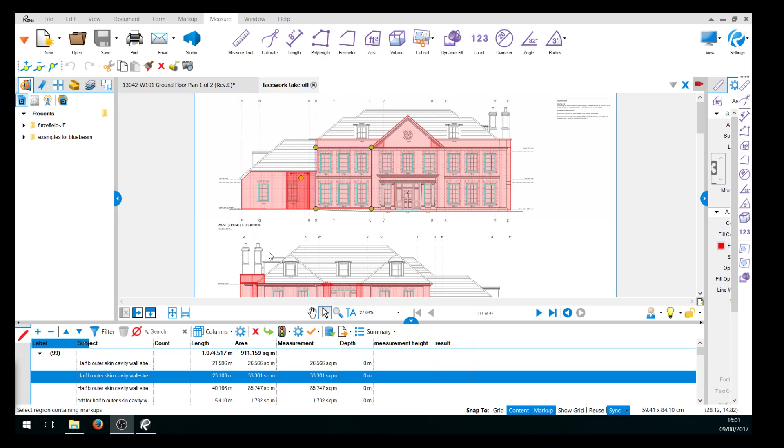Taking off, do's and don'ts and tips. And before we do that, there's one thing I'd like to explain that I didn't quite touch on before when I was explaining how this spreadsheet, as I call it, area works.

That is basically that this length, width and height column that appears in Bluebeam by default will pre-populate with the data from an area tool. So for instance, that one you can see highlighted by the bounding box and the nodes, that's the side dimension of the width and the height for that shape. Don't confuse that, so that's why they're now turned off.

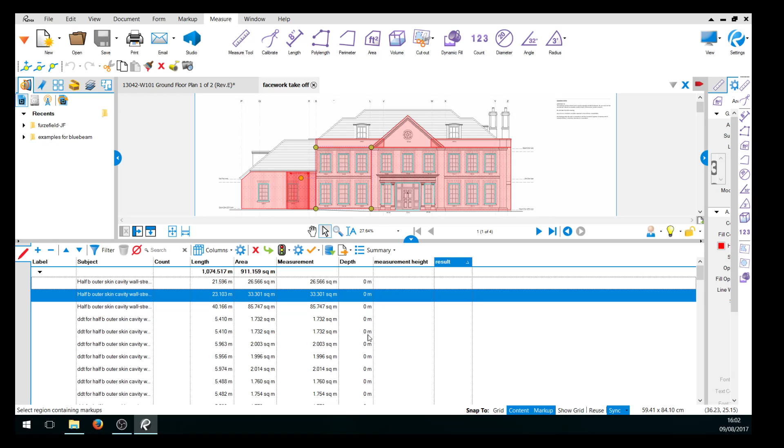We're only concerned with the area tool as we measured it, so that can cause a bit of confusion. Be mindful of that. The reason I'm differentiating between that now, and didn't do it previously, is I've got these custom columns I've created over here that manipulate data in a way you may find useful when we look at this plan taking off. So let's move on to that.

So let's calibrate this drawing here, and I'll talk you through a couple of do's and don'ts or tips on plan taking off. So we'll calibrate and we'll go 3.72. So we're now calibrated, let's just check that.

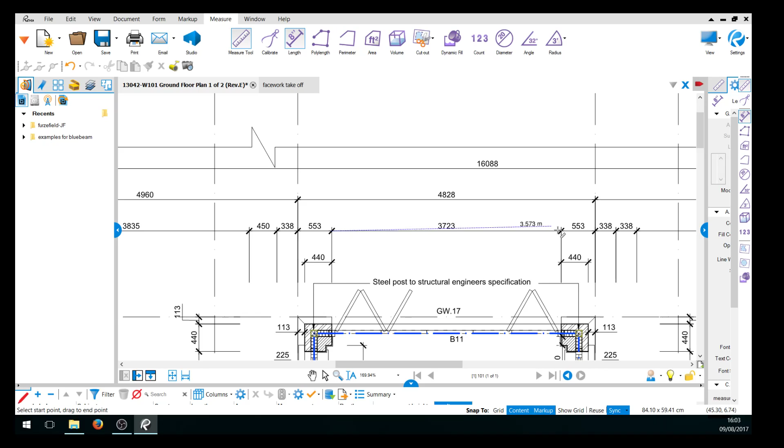Near enough, right. Let's go for this internal 215 block work we've got inside here. Let's find the 215 internal block work tool. And I've got it here. So let's try a couple of dims in here.

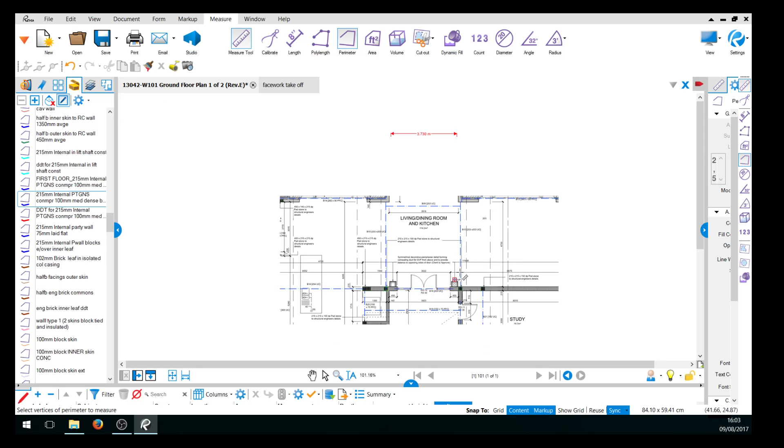Now I don't know about you, but on a one-off job like this, I wouldn't always spend the time taking off, deducting the doors. Conversely, I just wouldn't measure the hoisting and bedding of the lintel. But if you are going to go down that route, and you need to go down that route, what I suggest you do is create an inverse tool.

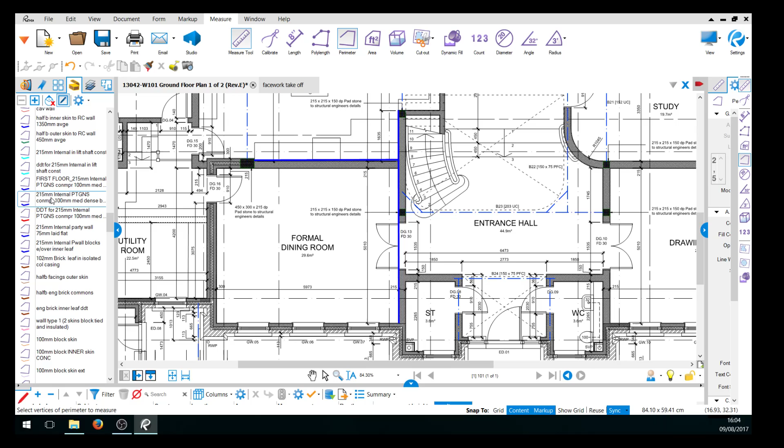So you've got the 215 partitions here. I've basically got a deduct tool for the same, and all I need to do is go in and put that dim in there. It's contrasted so I can see. So you can see in my subject window, I've got my 215s.

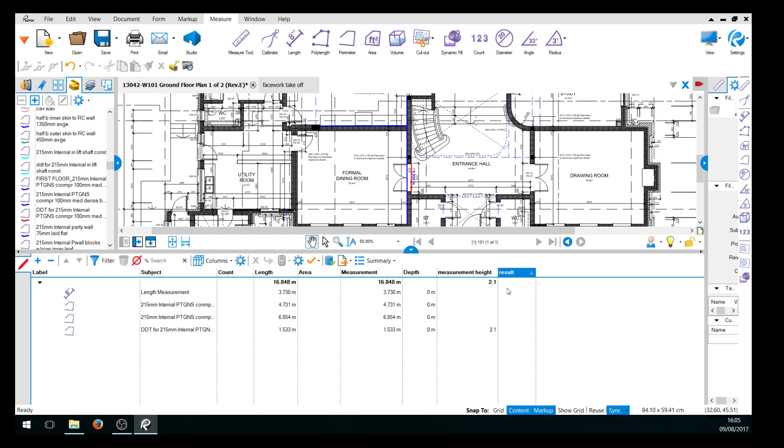When I export that into Excel, I can put my story height in there, and I've got my deduct for my 215s. What I've done, I've created a custom column here just as a bit of an aide-memoire, so I could put in here the height of that door that I've deducted at 2.1. There is a way of making this column add that up, and I'll come onto that in a few minutes.

Again, applying the same principle, on this particular job I took off the cavity work through the wall elevationally, and what you might notice is the majority of it is 100mm inner skin, but there are certain areas where the planks are bearing that I've got a thicker wall on the inner leaf. So I would just need to add that as an extra over.

So I've got an extra over tool for additional thickness. I've got this as 100mm, but you can create a tool to suit. So all I would do there is very similar to what I've just done with the deduct.

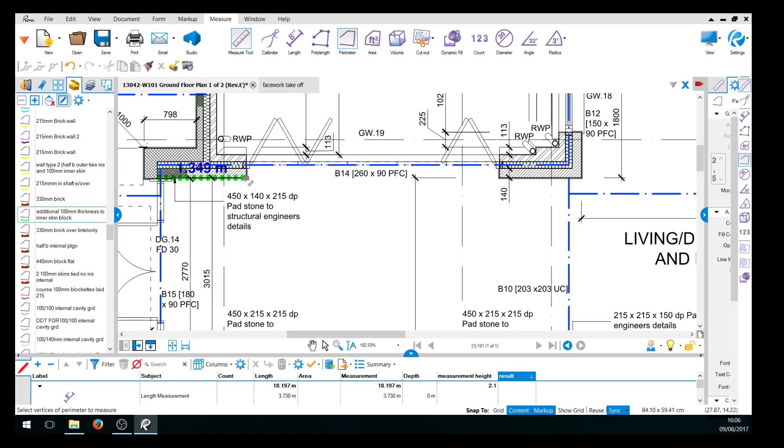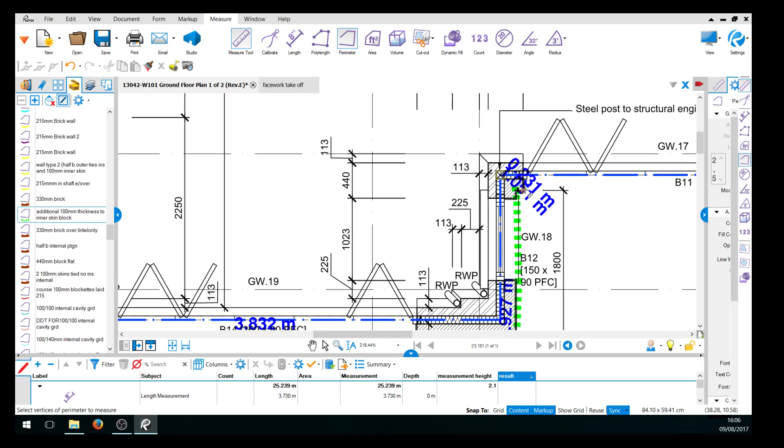I'll measure that pier, I will measure the opening, that pier, round to there. The reason I'm doing it separately is so that I can go and put my height in separately for each one, rather than have to redo the deduct, because it's only an extra over.

So for instance, I've got that pier at say 3.2 story height, that opening at the remainder, what's left above the lintel. So it's probably, I don't know, say it's 600 left, 0.6, whereas that pier there is my full story height.

Again, once you export that data, you can manipulate it in the spreadsheet window. I'll show you quickly how to create a custom column also that can take that height and that length and actually give you a result here before you export it.

Sometimes it's handy, but again I find it's information overload, because 9 times out of 10 I know what I've taken off in the takeoff window, and I'm going to manipulate it in Excel once I get it into Excel myself.

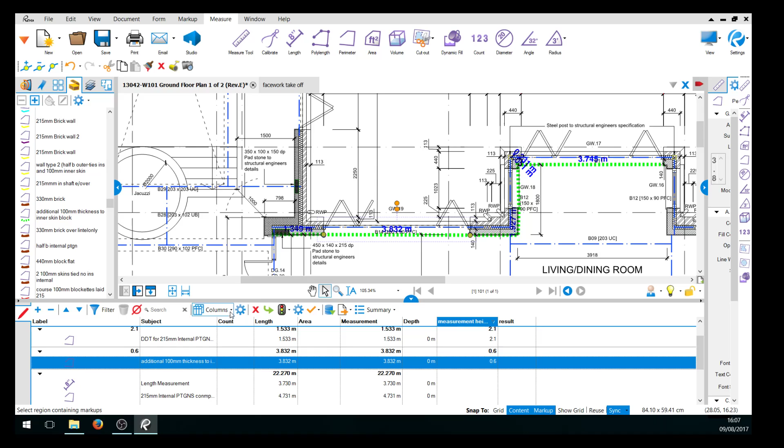But the way you go about creating a custom column, it's the same for this column here. I've called this measurement height because the inbuilt width and height columns only apply to areas. How you would do that: you go to columns, go to the cog, manage, and once you open up the dialog you'll see custom columns that I've created, in the custom columns tab.

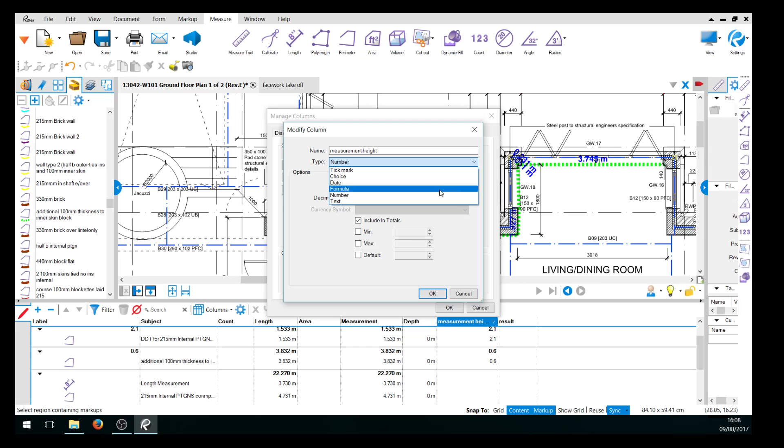If I just modify that, so what you do is name the column. I've named it measurement height, and you tell it what type of column it is. It's a number. You can have a text column, date, or formula—we'll come onto formula in a minute, that's what the result column's based on—but this is number.

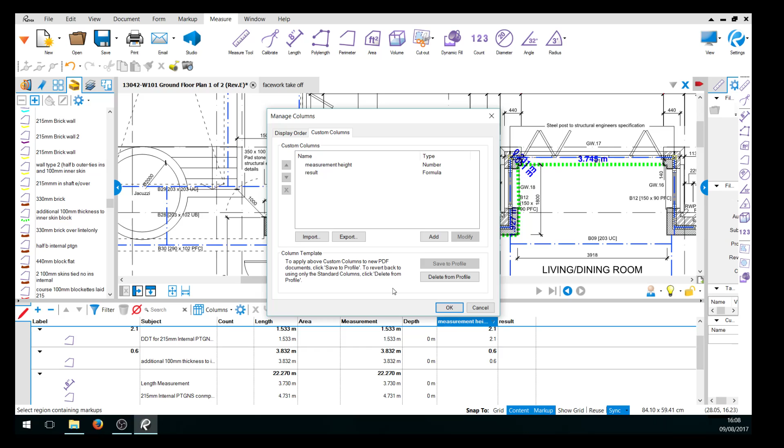And that's basically it. What you do need to do is save to profile once you've created it. Otherwise it will be available for use during the session you're taking off in, but when you come back to Bluebeam next time it won't be there—you'll have to do it again. So that's how you create your own custom measurement height tool that will accept input, and it accepts the input by double clicking on it and just typing directly in.

Show you how that custom result column works. I've already done it, but I'll go through the process of how I originally created it. Modify—so I've named it result, and I've told it that it's a formula.

What we need to do is start typing, and the variables that are available will present themselves as a drop-down list for you to pick from.

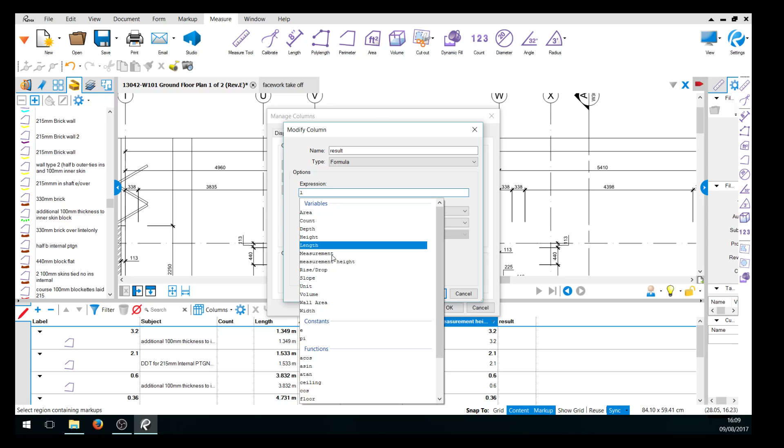So if I pick measurement, and then—this is like you would do if you would write the syntax in a spreadsheet—measurement times my custom measurement height. Set the decimal places, include it in the totals, and click OK.

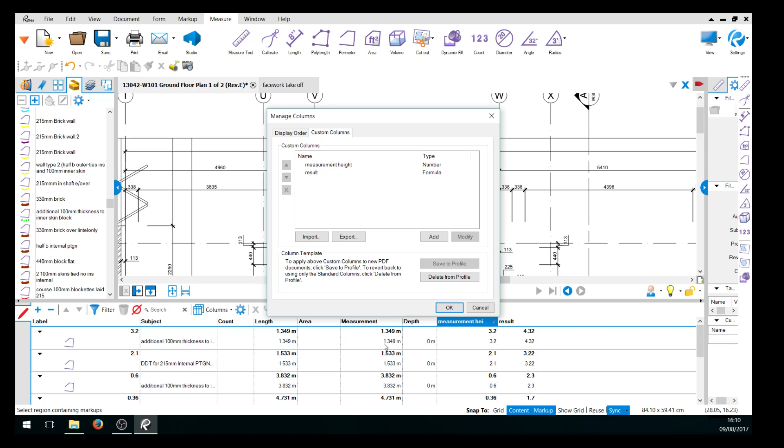Save it to profile, OK. Now do you see the way that automatically calculated the 1.349 by the 3.2 and gave me a result? That will all be exported into Excel. It's a really handy tool if you like to work in that fashion.

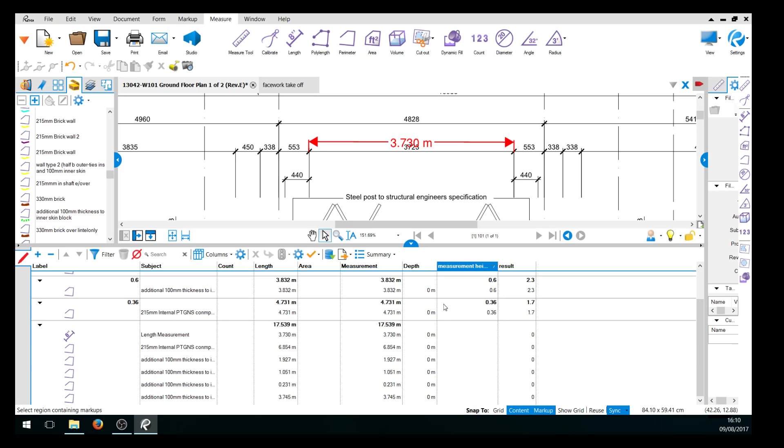But again, be aware that the more you export in this fashion, the more you've got to manipulate once you get it out into the spreadsheet. So bear that in mind.

Counting. Again, supposing we had some fire stops we wanted to count—find the count tool. Oh, I haven't got my tools switched on. Okay, so there we go.

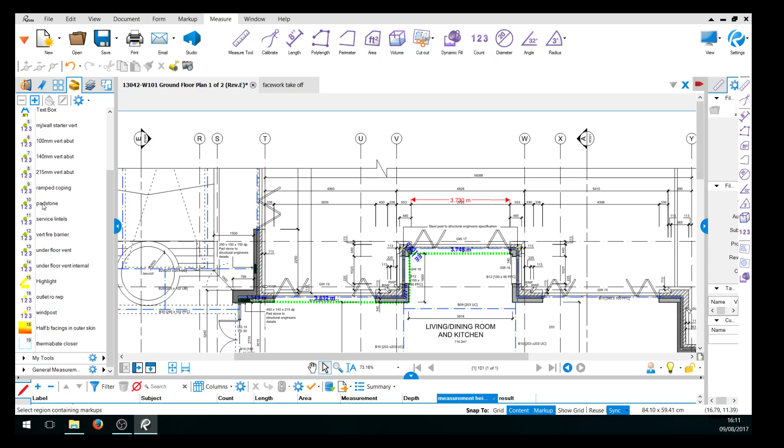Let's do padstones instead. So we've got a padstone there, we've got a padstone opposite—and that's a 140 padstone, that's a 215 padstone.

Again, you've got the ability to pick your padstone, and because it's a count you can do like we did with the polylength tool and split all. What that will do is count down each instance of the padstone.

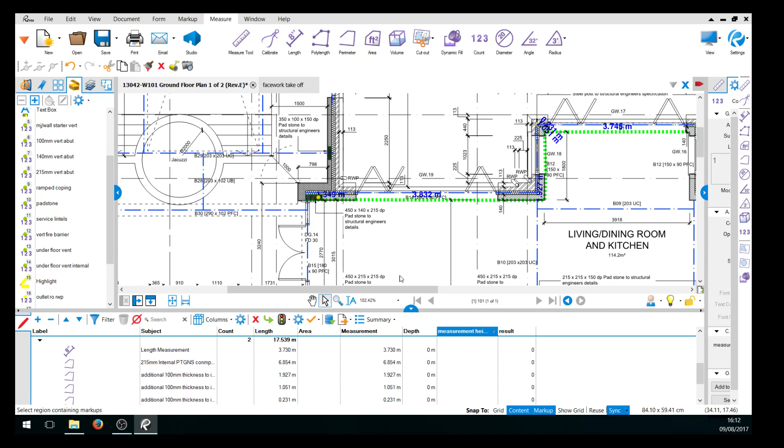As you'll see, as I click through each individual one, it will highlight in the window—so that's that one, you can see it bolded out, and that's the other one. Now I can just label these: I can put 140 thick padstone, and I can put 215 thick padstone.

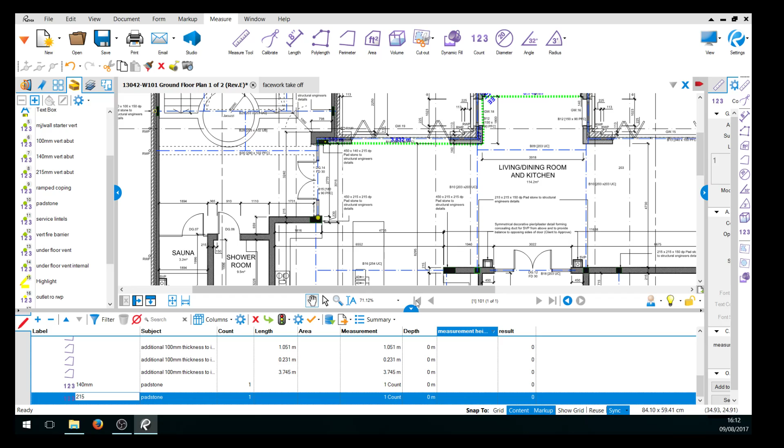So it's a way of annotating the differences between similar items, and you can go right through the whole ground floor doing all of those as you need.

So as I said, you might want to watch these couple of videos more than once just to get the gist of it. But when we go through the guided taking off exercise, these should all ring bells as we do what we need to do. So we'll see you in the next video.